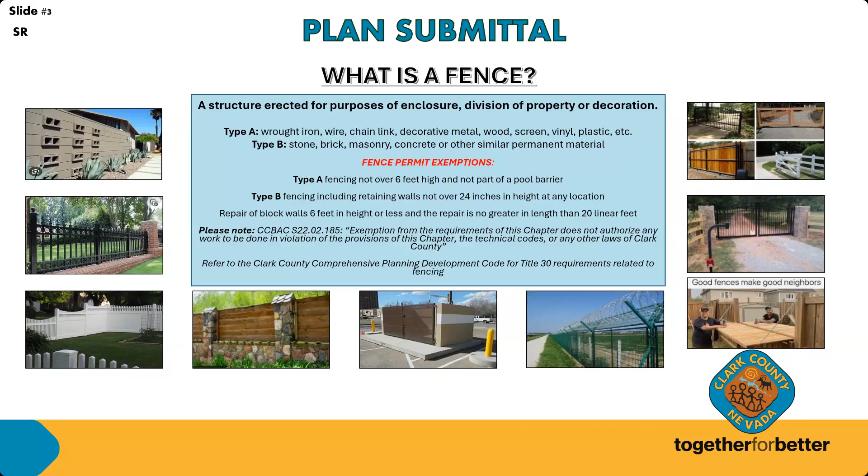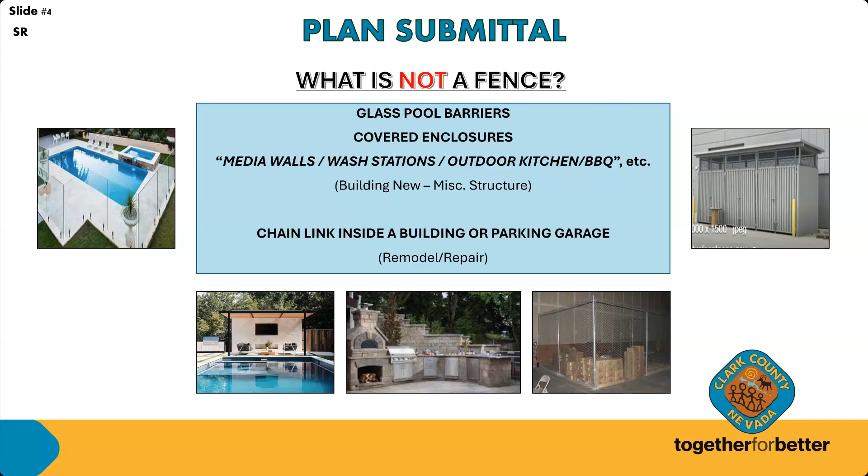So you've got glass pool barriers - you may think it's a barrier enclosing a pool, but for permitting purposes we want to permit that as a miscellaneous structure. A lot of this in terms of permit type has to do with contractor licensing, etc. So again, if you're not sure what permit type you need, if you're building something unique that could or could not be a fence, you can always reach out to us. Next slide.

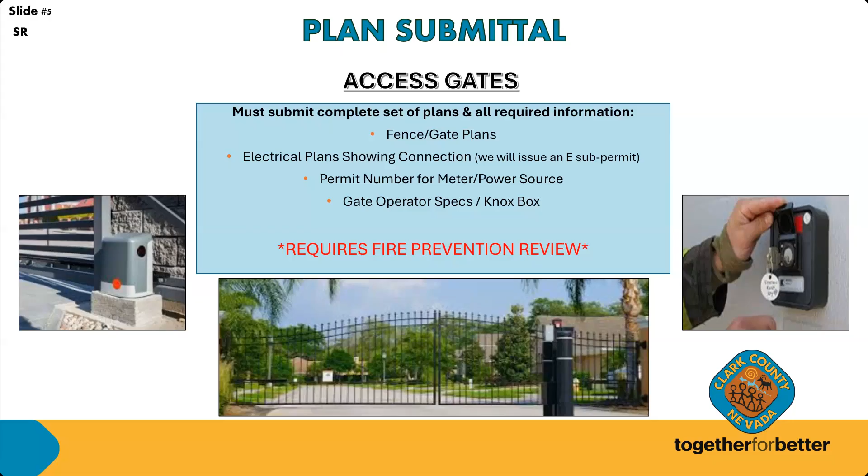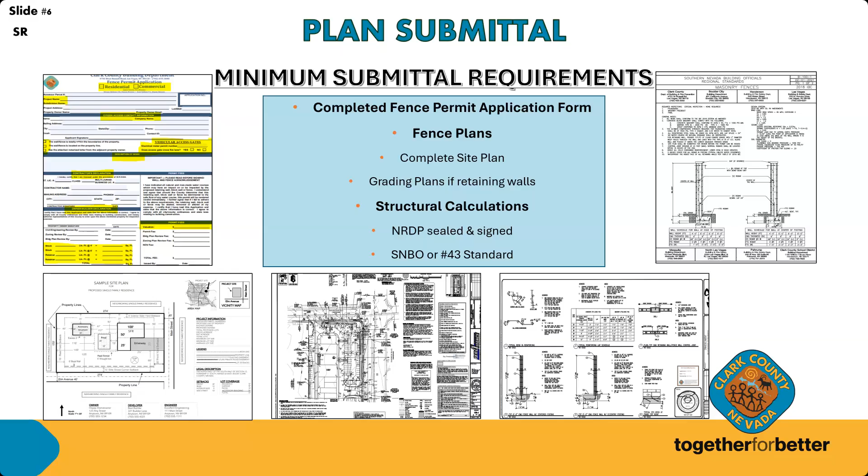I try to answer my phone as much as I can, but sometimes I find that an email is quicker, especially when we have to provide links and things like that. If you want to reach out to me, I'll try to return your call within 24 hours. With that, I think that's all for plan submittal.

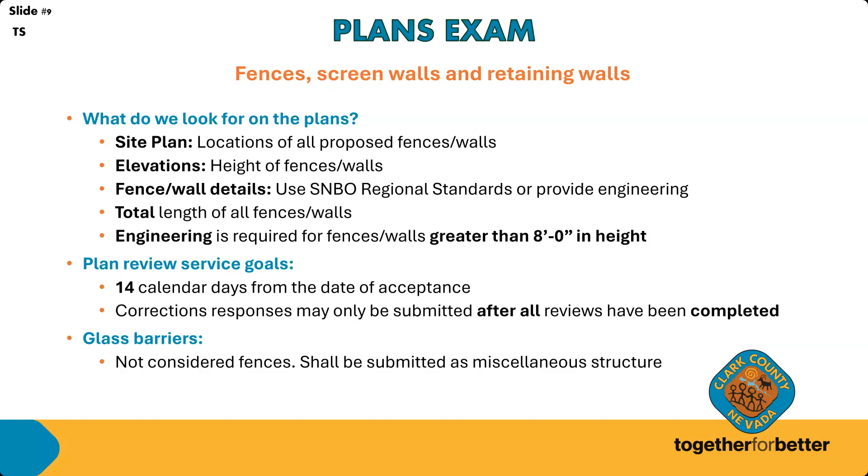Engineering, calcs and structural plans are required for anything over 8 feet. The plan review service goal is 14 calendar days from date of acceptance, and corrections, if issued, we have 10 days to review from when responses are submitted, also 10 calendar days. Glass barriers, as Stacy mentioned, those are considered miscellaneous structures, not fences.

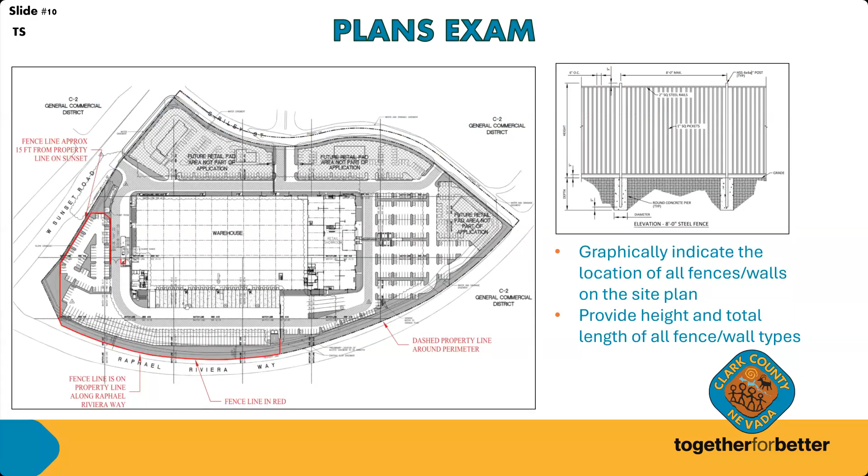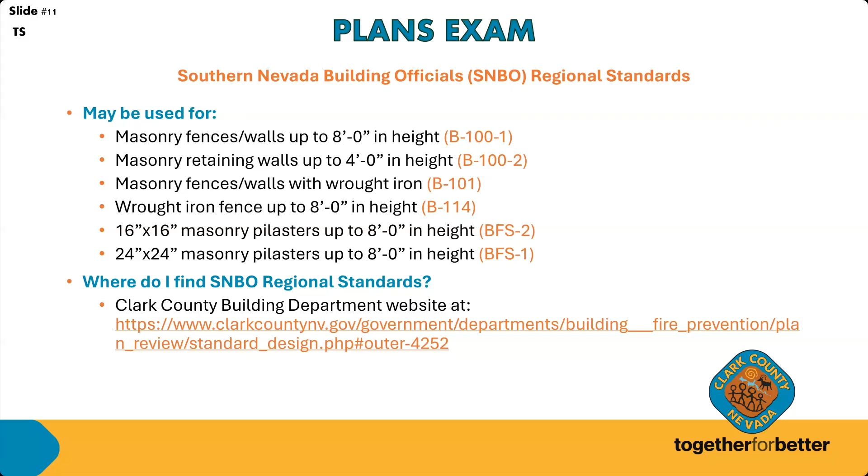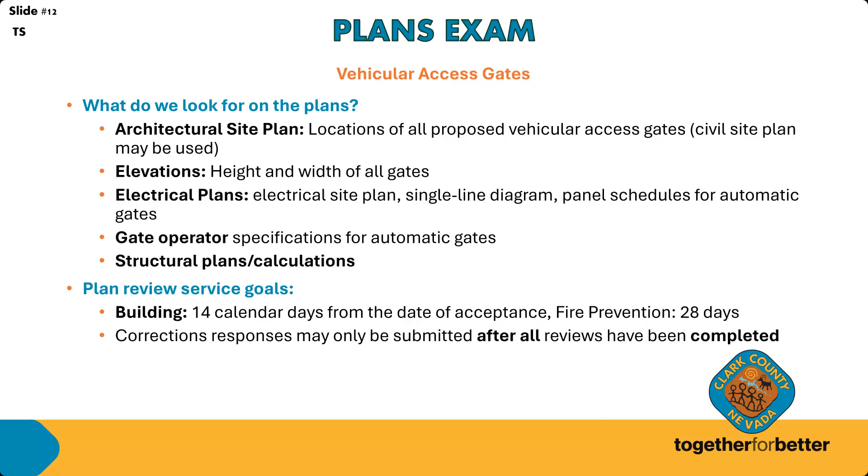This is another example of a site plan with the gates highlighted, gate elevation with dimensions, and a spec sheet for the gate operator. I think that's it - we can turn it over to fire prevention.

Thank you, Tarek. Oh, I'm sorry, Shannon, I'd have to - since we didn't have a slide on that - cover revisions. Revisions to fence permits: if you're adding length or height, or reducing the height or length of a fence, that's not allowed under a revision to a previously issued fence permit. That would have to be a supplemental or a new permit.

But if the revision is to modify, say, the elevation design of the fence, something that doesn't impact the height or length, that can be done as a revision. Or sometimes it's just moving the fence over a foot or two, changing the setback, but it could still be approvable as a revision, as long as the height and length don't change. Thank you, Tarek.

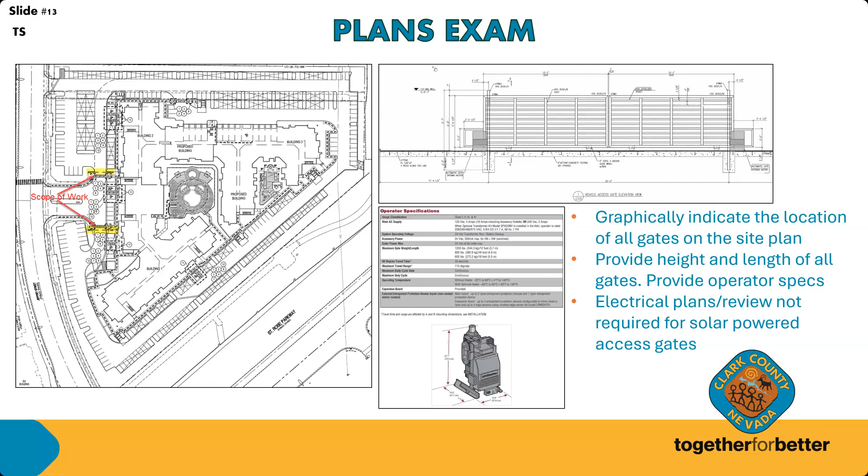On our first slide, we discussed the gate class types, and we'd like those labeled on the plans.

And then we have the applicable codes: the 2018 IFC, our amendments to the 2018 IFC, and listings and ASTM requirements. If you're going to have electrical gates and operations, they all need to be listed per those codes. As far as submittal requirements, it's going to be the same package as building, so most of this initial stuff will already be included with building.

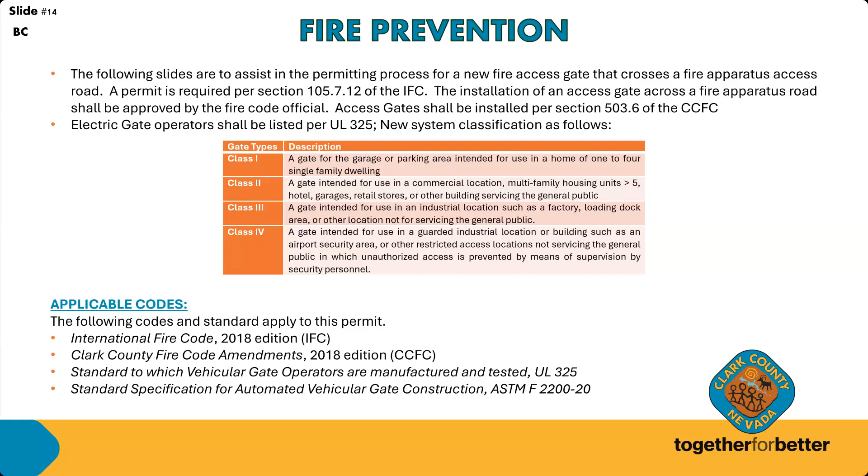Back to the gate type, the main thing we're going to be looking for here, I'm surprised we didn't put it first, is our site plan. Some people will make a site plan called a fire prevention site plan, or we've often stamped the site plan that's been submitted to building for the architectural site plan, just one of those types of site plans showing the gates.

We want a designation on this plan that we're going to stamp, showing whether the gate is automatic or manual, and the type of gate - horizontal slide, swing, vertical lift - the direction it's going to open, if it pivots, and in that same location clarify the class. Provide that on the site plan, the same site plan building's going to be looking for. We just want those additional notes about the gate.

And the gate opening has to be a minimum - if it's blocking a fire access lane, that's where a fire prevention permit is required, so that's when it's considered a fire access gate. I should have explained that better right off the bat, but a fire access gate must be a minimum of 20 feet wide, and the access lane it's blocking has to be a minimum of 24 feet wide.

So the access lane can only go to 20 feet wide right at the gate - we need that 24-foot width in or out, however the gate is done. If you have multiple gates, like an in and an out, we need at least one of the gates to be on a 24-foot fire access lane. Both gates will be required to be 20 foot, and we have allowed narrowing of the exiting gate or something, but we want at least one of them 24 wide for the fire access lane.

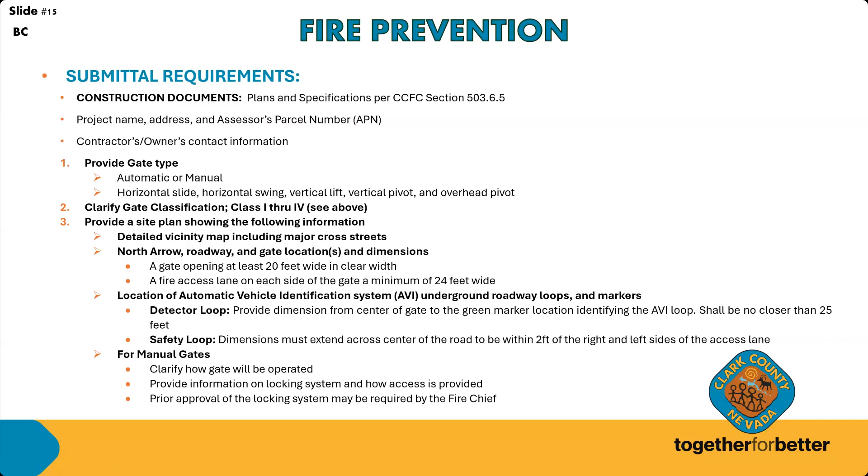If it's an AVI system, which is electrical, then it's required to have an AVI system. So we're going to be looking for the detector loop and all the other safety loops, as they're calling them. These types of systems are the items we showed on the first page, manufacturer tested per UL 325 and ASTM requirements. We want to see the listing information and make sure it's per these styles, as you can see on page 3 - we describe quite well what we're looking for.

Also part of the listing is the AVI transmitter information, and you can contact the warehouse. What happens is when you buy one of these AVI systems, those transmitters will automatically be sent to the fire department warehouse. Manufacturers and gate installers understand and know that transmitters are always sent to the fire department, then distributed from there.

These are for all types: ambulance, fire, police, will all have the same type. It's like they call it a puck. It fits up under the car or the vehicle and allows access.

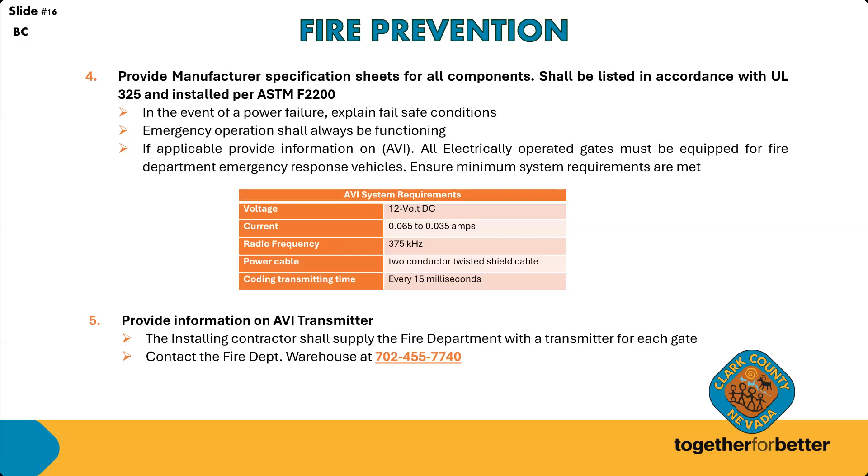The one other plan that we're always looking for on an automatic gate is the last page, which shows our entry loops, exit loops. What happens is these are buried wire underground that go to a listed panel, and when this device goes over top of them, it allows the gate to automatically open.

So we want to see a plan like this. We're looking for the loops to be actually 25 feet from the center of the gate. This isn't the greatest description, but we want that loop to be 25 feet from the center of the gates. And then the other thing we want noted somewhere, and quite often it's in the listing, is that the gate will fail safe in power failure in the open position.

I think if we see the items that I just described, we're pretty much good to go. We'll accept the gate. I can't think of anything else unless someone can think of something that I may have overlooked, but I think we're good. All right, thank you, Blair.

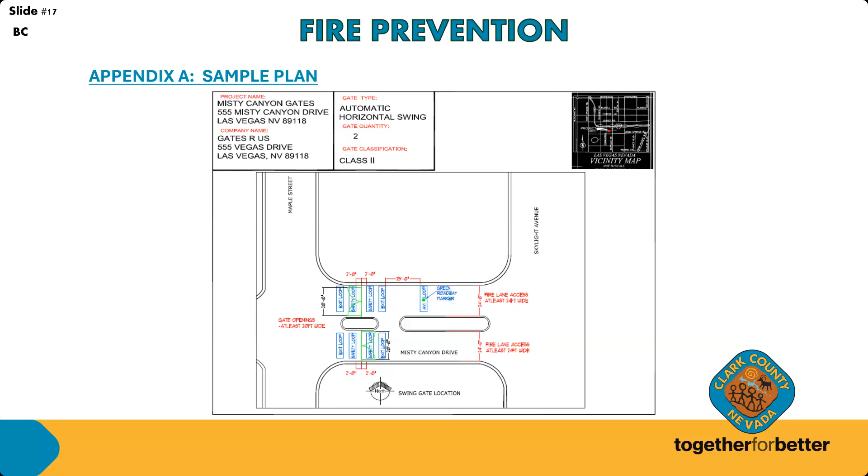So with that, we'll go into engineering, and I'll turn the presentation over to Ray Jones.

Next slide. Retaining walls or Type B walls greater than 24 inches require a grading plan which is prepared by a registered design professional. For commercial or subdivision projects, the Clark County Building Department approved grading plans shall be provided. Details showing the depth of the retained earth shall be included in the grading plans. Grading plans, structural plans, and structural calculations must be prepared, sealed, digitally signed, and dated by a Nevada registered design professional.

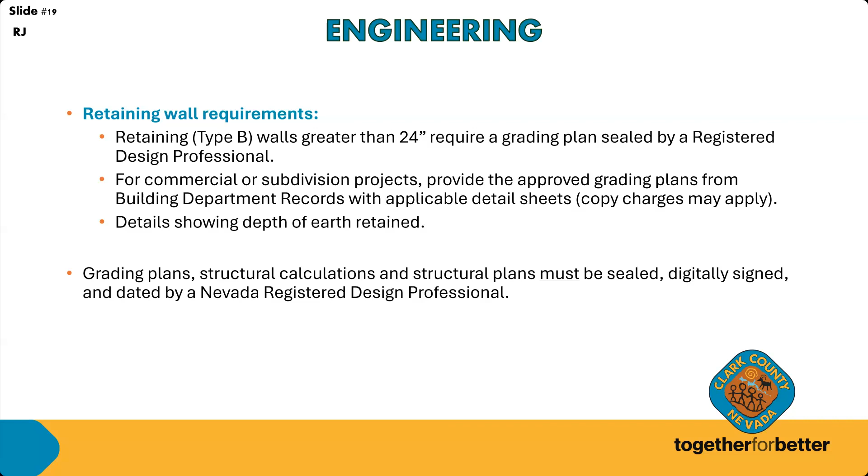Next slide. So the SNBO regional standards may be used in lieu of structural plans and calculations, given that the walls are within the height limitations of the standard details. The conditions of the walls must match the details exactly. One cannot deviate from the SNBO standard details. For example, sloped backfill or surcharge loading on retaining walls are not permitted.

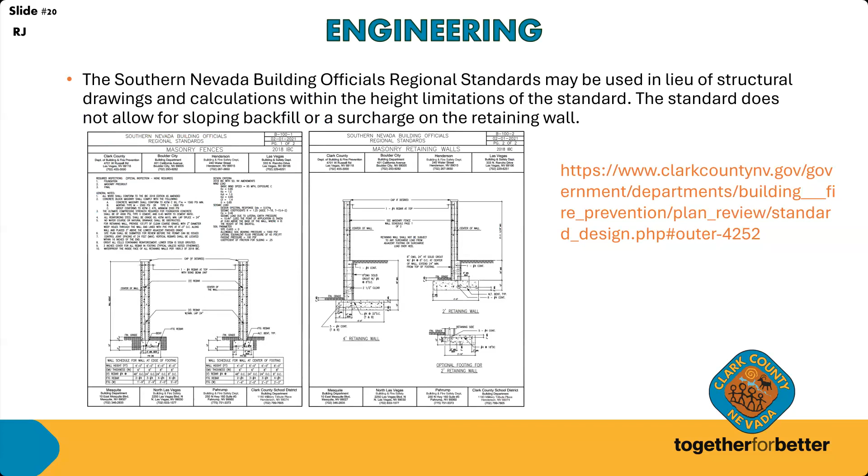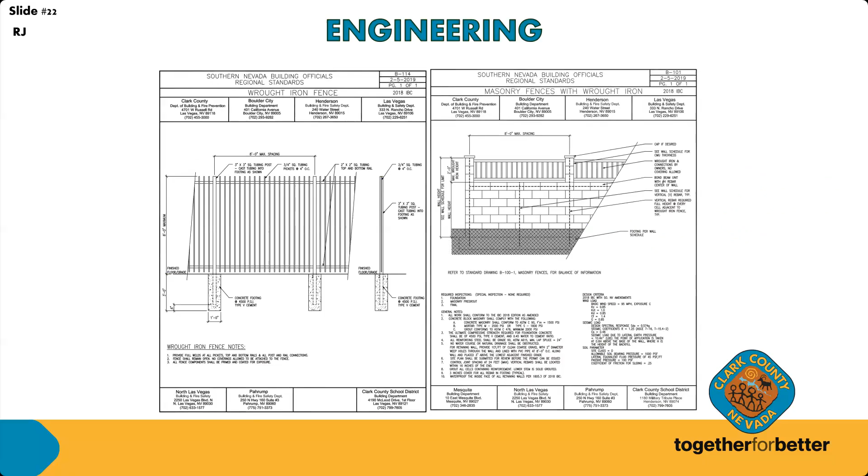So now we'll move on to the geotechnical and engineering code requirements for fences and retaining walls. Southern Nevada Amendment, Section 1803.2 states that fences and site walls less than 6 feet of retained height are exempt from a geotechnical report. When a soils report is not used, the maximum soil code presumptive values shall be used for the design. Where a geotechnical investigation is required, a written report of the investigation shall be submitted to the building department for review. The geotechnical report shall be prepared per Southern Nevada Amendment, Section 1803.6. All geotechnical reports shall be current within the last 12 months or accompanied by an update letter.

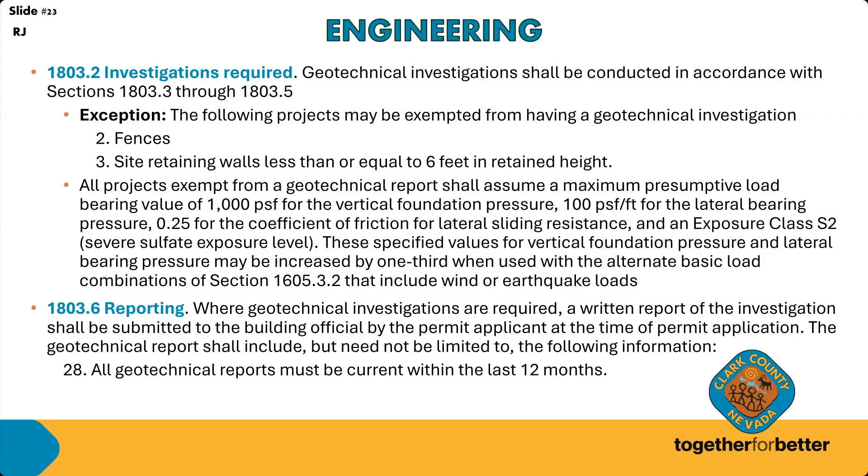Go to the next slide. When a soils report is not utilized, soil site class D shall be assumed per Southern Nevada Amendment, Section 1613.2.2. Southern Nevada Amendment, Section 1809.4 states that the minimum depth of the footings shall be 12 inches. Where applicable, the frost depth requirements of Section 1809.5 shall be satisfied. The minimum width of footings shall be 12 inches. Next slide.

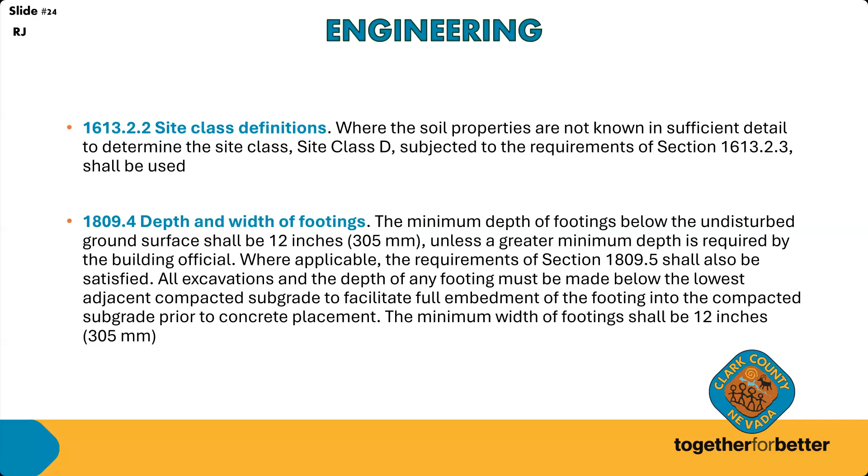Southern Nevada Amendment, Section 1610.1 states that the foundation walls and retaining walls shall be designed to resist lateral soil loads. Please refer to this code section for the code presumptive design values. And go to the next.

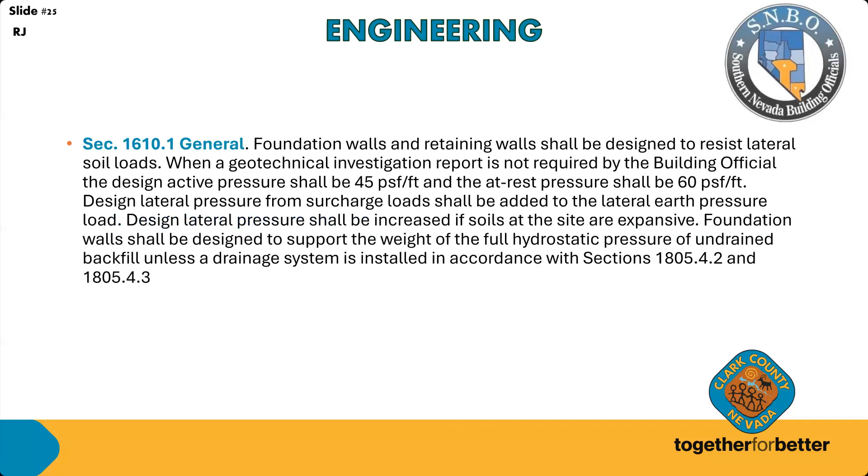Southern Nevada Amendment Section 1610.1.1 addresses the seismic loading for basement, foundation, and retaining walls. These walls shall be designed to resist the seismic load due to the lateral earth pressure based on the equations below in this slide as required per section 1807.2.2. Okay, next.

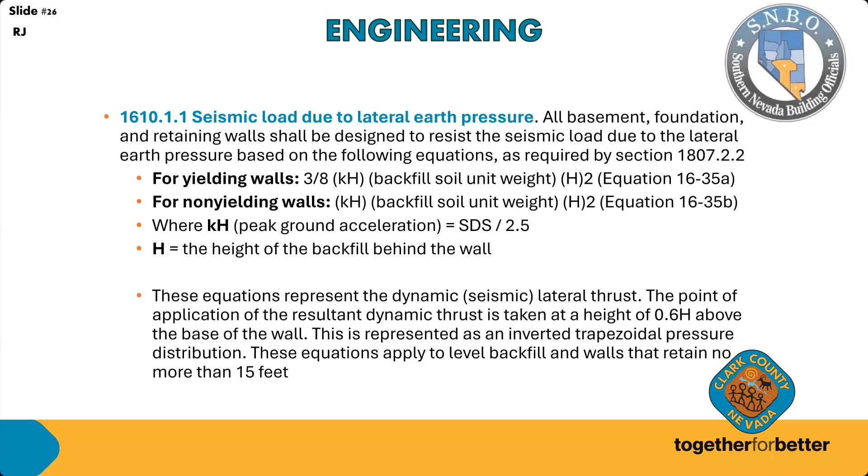Section 1807.2.3 discusses safety factors. Retaining walls shall meet a minimum safety factor of 1.5 for sliding and overturning. Alternate load combinations discussed in this section shall be used to design the retaining wall footings instead of Section 1605. Where earthquake or wind loads are included, the minimum safety factor for retaining wall sliding and overturning is 1.1.

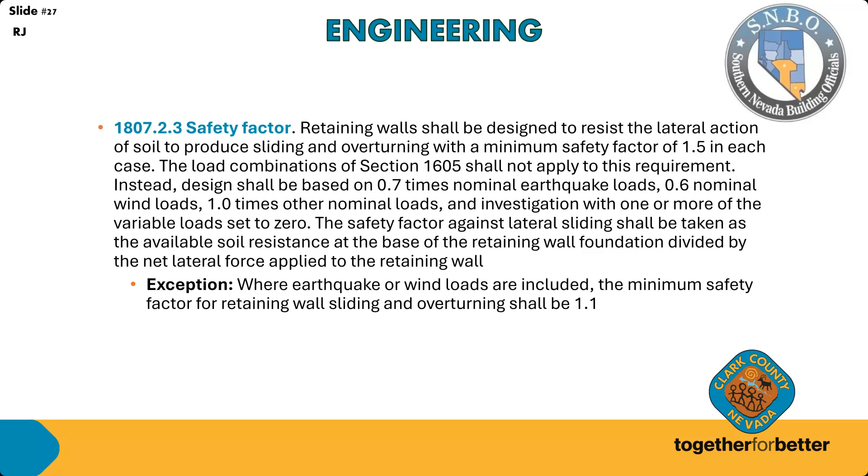Okay, now we're going to move on to the special inspection requirements, which are required for each material type.

Southern Nevada Amendment Section 1705.3 states the special inspection requirements for concrete. This section does include an exception for isolated and continuous concrete footings supporting walls, where the structural design of the footing is based on a concrete compressive strength of 2,500 psi, regardless of the concrete compressive strength specified in the construction documents. Please note that all concrete walls require special inspection.

Southern Nevada Amendment Section 1705.4 states the special inspection requirements for masonry. There is an exception for masonry special inspection where the masonry walls are designed with allowable stress design at half the masonry compressive strength. The walls must also meet the height restrictions listed here within this code section.

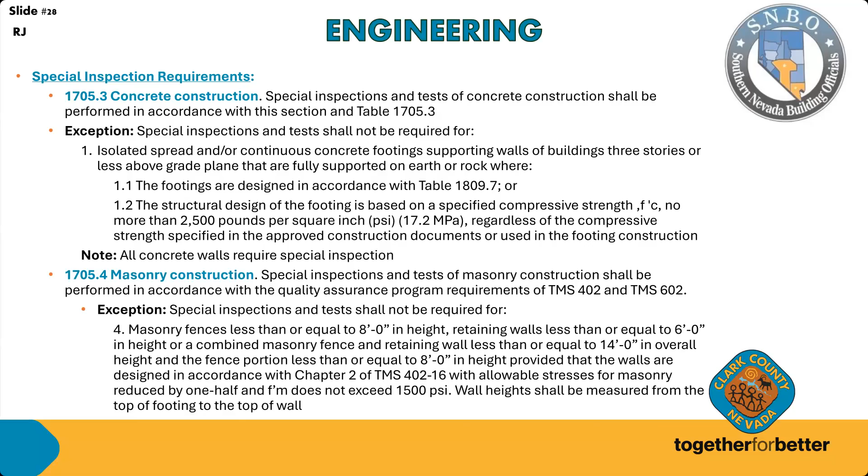Southern Nevada Amendment Section 1705.6.1 is for the special inspection of wall backfill. Special inspection of wall backfill shall be required for site retaining walls when the retained soil height exceeds 6 feet, or for portions of the wall that receive surcharge loading from adjacent walls or other structures, regardless of the retained soil height or sloped backfill.

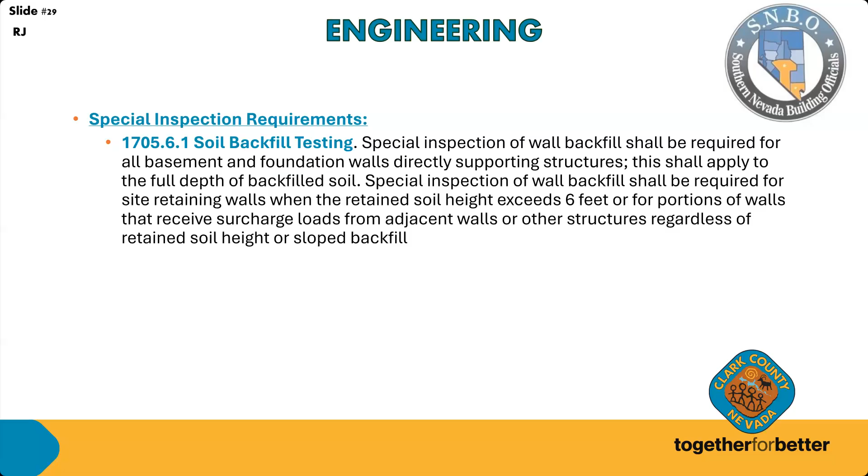Here's some helpful hints for your submittal. Please ensure that the scope of permit is shown on the grading plan and applicable details are provided. For example, if you're applying for a 4-foot maximum retaining wall, please do not include details for 6-foot and 8-foot maximum retaining walls. The wall section shall show the drainage system for retaining walls.

If a soils report is being used, please provide that soils report. Also include the geotechnical information within the structural general notes. And then also list all of your special inspection requirements on the plan.

If special inspections are listed which aren't required per code, the plans examiner will indicate that the special inspection is required since it was requested by the registered design professional. Similarly, do not include a blanket list of special inspections. Inspections should be specific to that permit.

And then finally, the soils report, the structural plans and calculations shall be digitally signed and electronically sealed by the registered design professional. A signature image is not a digital signature and does not meet the security encryption requirements.

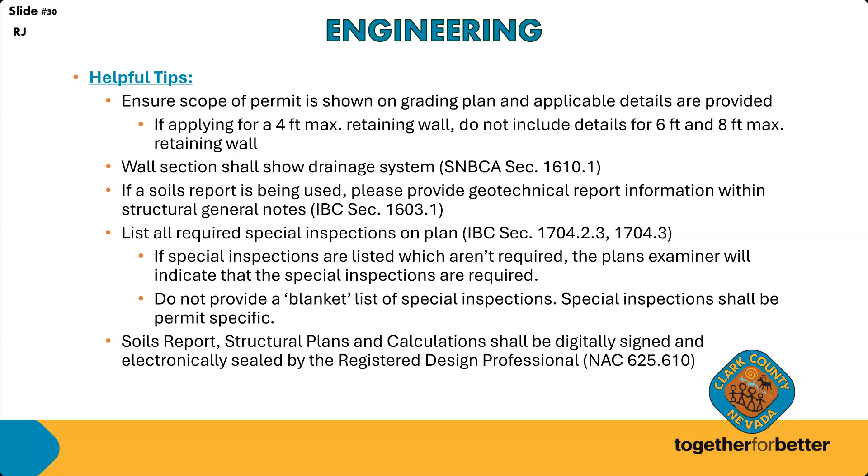So let's move on to our civil review by Public Works Development Review Team, and I'll turn over to Debbie Lay.

Hi, my portion of the review is basically what civil does: we look at drainage, we look at easements, there's a lot of engineering that goes into the plans, and so my part is to make sure we're using the plans per the designs for the project.

So all the thought process should be done, and we're just making sure that the walls aren't in conflict with those designs. And so again, like the others have said, it needs to be a clear plan, as much information as possible to make it clear.

But in a lot of cases, we already have grading plans for the project. And ideally, we have those plans, and you're just saying, these are the walls we're building per these plans. And so that's a lot of the trouble that we run into, is just that we're not getting the version of plans that we want.

Like it might be an unsigned version or a version that's not consistent with the designs. So as far as the majority, like the subdivision block walls, that's a lot of the problems that we have, is that it's just not the approved grading plan.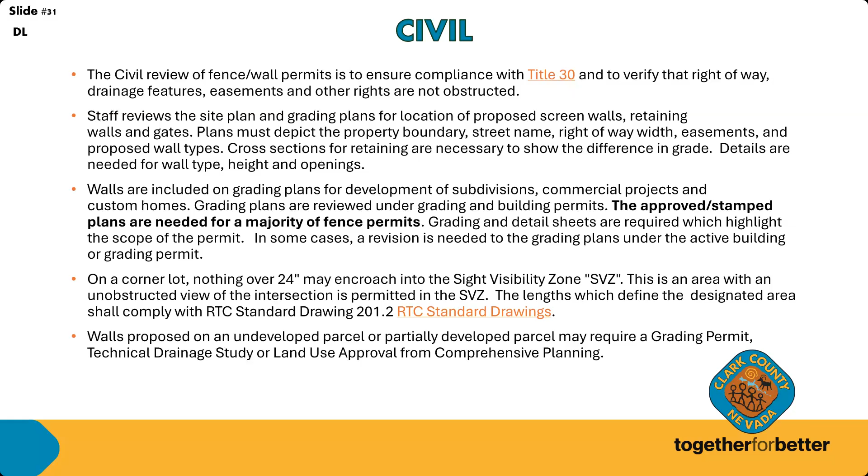Next slide. Can we get the next one? Debbie, this should be the next one about gates. Do you see it? No, it's not. Oh, okay, here we go. Sorry.

Yeah, I think that covers it. So again, we're looking at civil plans, not necessarily site plans, but we do make sure they're consistent. There's just so much more detail on the civil plans for civil and zoning to look at - that's preferred. But if it's a property that's existing for many years and there's no new approved plans, then we'll just review it with the codes specified there.

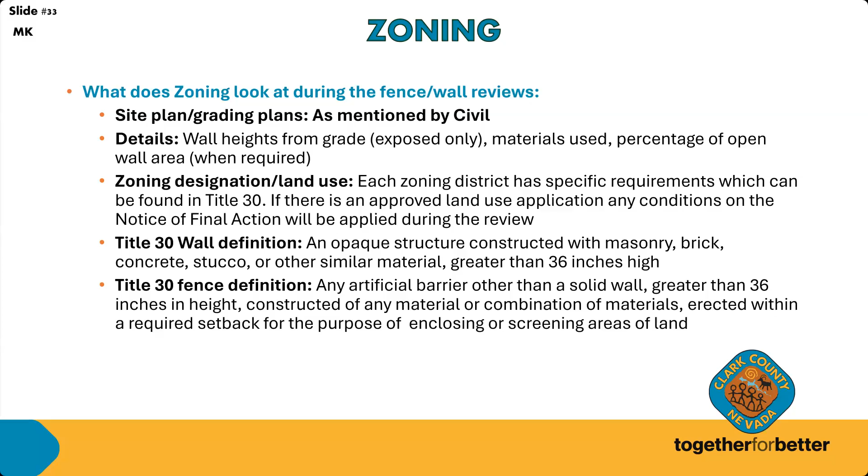Okay, next page. Single family - normally fences and walls proposed outside of the setback shall be limited to primary structure or accessory structure height, whichever is less.

Front setback: fences or walls proposed within the front setback shall be limited in height as follows. Residential district, 3 foot maximum within the first 15 feet. A fence may be increased up to 6 feet if decorative in those zoning districts RS 80, RS 40, RS 20, and RS 10. I hope you guys know that we changed the zoning naming district.

A 6 foot high wall is permissible along collector and arterial streets. So those are the difference.

A single family dwelling may restrict access with an access gate if access to the dwelling is from an arterial or collector street. The access gate shall be set back at least 20 feet from the property line, and this one we coordinate with the fire department. So normally when they look at it, we coordinate when approving gates with fire department and architecture. In the urban area, fences and walls along a street shall be decorative.

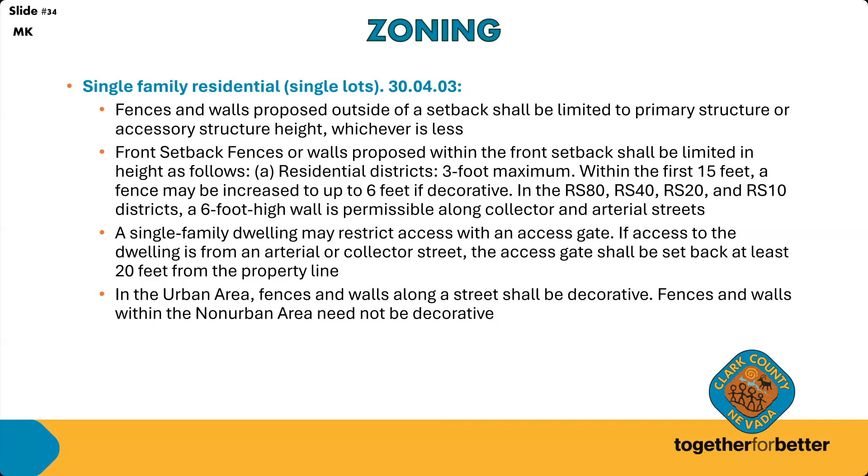Fences and walls within the non-urban area need not be decorative, in areas like Moapa or Logandale or somewhere. Those are non-urban areas. Okay, next.

Commercial and residential subdivision and community walls. Walls being reviewed for commercial projects and residential communities are required to be submitted on approved grading, as engineering and civil mentioned. Normally this is the problem: sometimes people just submit plans where they don't have approved grading, and we want approved grading, and that should stick with everyone - that approved grading should just show where the walls are going to be erected.

The address for the permits is typically the grading permit address. So make sure you just look at what the grading was addressed. That is the address you put for your walls.

Retaining walls shall be no more than 3 feet in height as measured above finished grade of the street, sidewalk, or adjacent property. Retaining walls may be increased to 6 feet as follows: the fence located on top of the retaining wall must be 85% open. Subdivision retaining walls along a residential or local private street shall provide a minimum of 6-foot landscape strip between the wall and the sidewalk of the street. Interior subdivision retaining walls between residential lots with initial development may be increased without additional landscaping requirement.

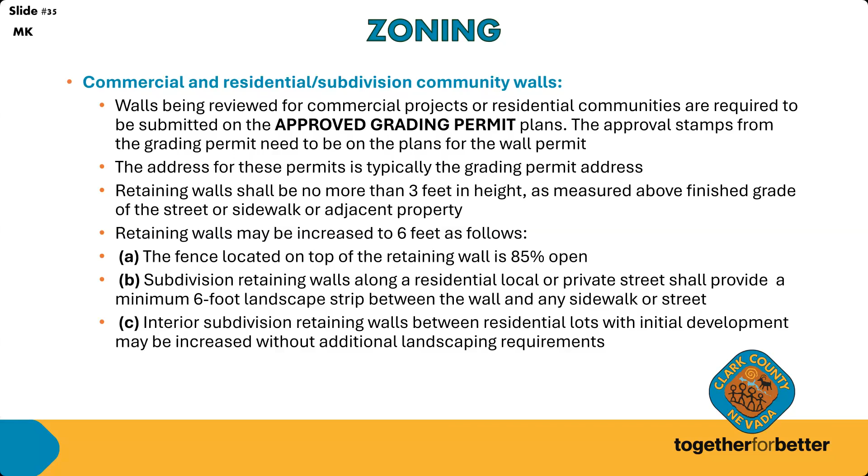And with that, let's say you got all your disciplines reviewed and approved on your fence permit. So we'll move over to assessing your fees, and I'll hand over to Dana Margaritis.

Hi, so the fee workup team will calculate the building permit fees once all the workflow tasks have been completed. The building and plan review fees are based on the project valuation, which is determined by the total value of work, including labor and materials. You can find the full definition in the administrative code on our website - go to Services, then Library, Current Codes and Ordinances.

If you'd like an estimate of your permit fees, you may use the fee calculator on our website. To locate the fee calculator, go to Services, Permit Issuance, and then there is a tile labeled Fee Calculator. Please note, in addition to the permit and plan review fees, access gates will also be assessed a fire prevention fee of $90 per access gate.

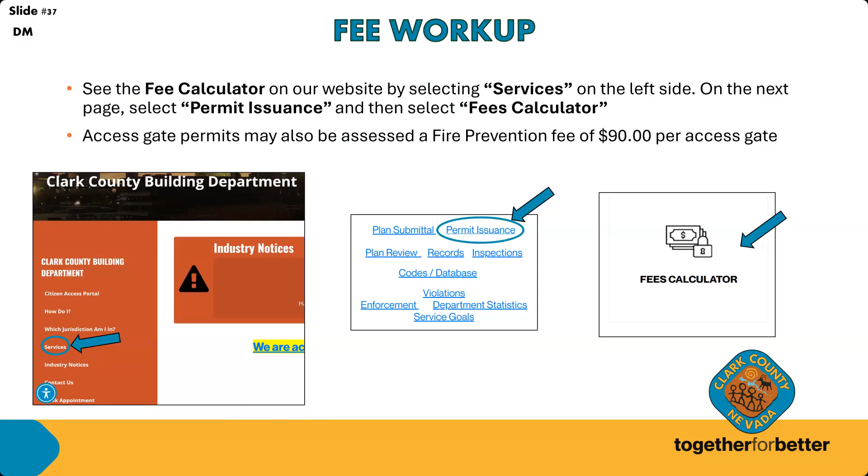On the fee calculator page, select the blue fee calculator, then go to the next page and select permit. Once you enter the valuation, it will calculate the permit, plan review, and zoning plan review fees. There will be no plumbing or mechanical fees associated with a fence or a wall. In the event there is lighting on a block wall or electrical for the access gates, those fees will typically be charged on the electrical permit.

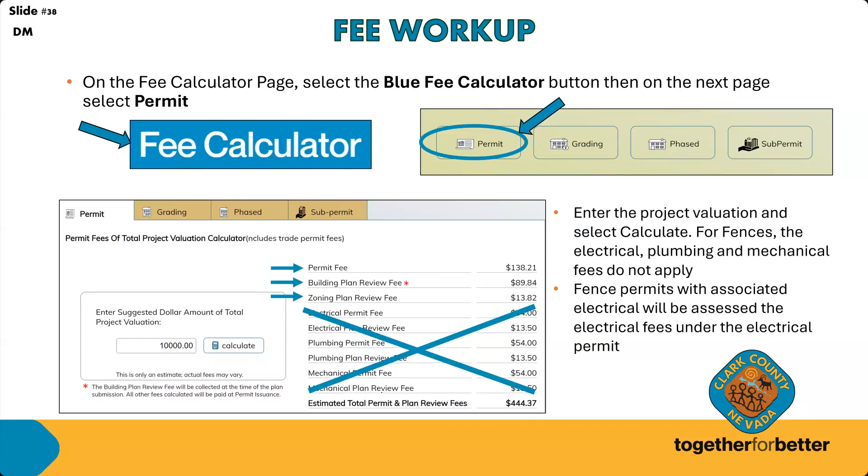Once the fee workup team has finished calculating the fees, they will put the permit in ready to issue status. The contact will then receive 2 emails: one letting you know the permit is ready and the amount due, and the other letting you know you have conditions that need to be met prior to issuance. Make sure to open the attachments in the emails to get the invoice and the list of conditions.

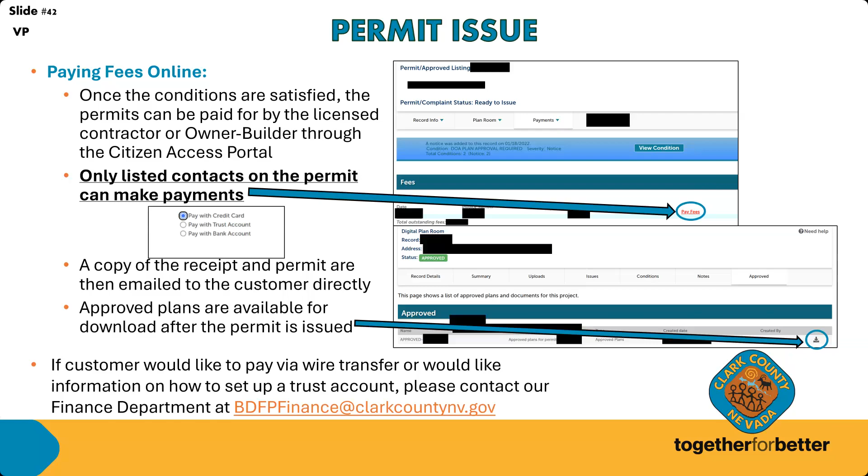Thanks, Anissa. All right, so you got your permit. You're going to go out and construct your walls, and I'm going to turn it over to Matt Brewer so he can go over inspections with you.

Available to schedule. They may not always line up with the type of fence you're building, but you can always talk to me or one of the supervisors and we'll get you on the right track.

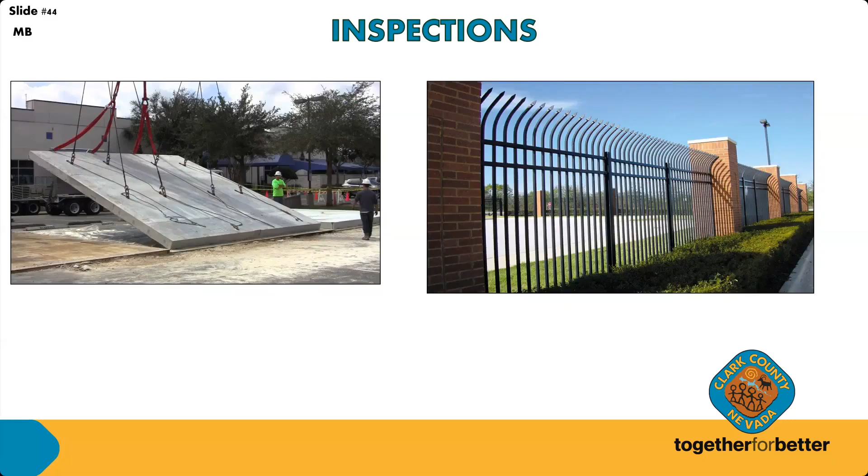You may not always have CMU or pre-grout, but the types of permits we have, this is kind of a one-size-fits-all. So we'll conduct the inspections that are required. But like you said, if there's any questions, just reach out to us and we'll help you out along the way.

That type of installation will require special inspections, so just be aware of that. Make sure that your third-party agency is on board and performing those inspections as needed.

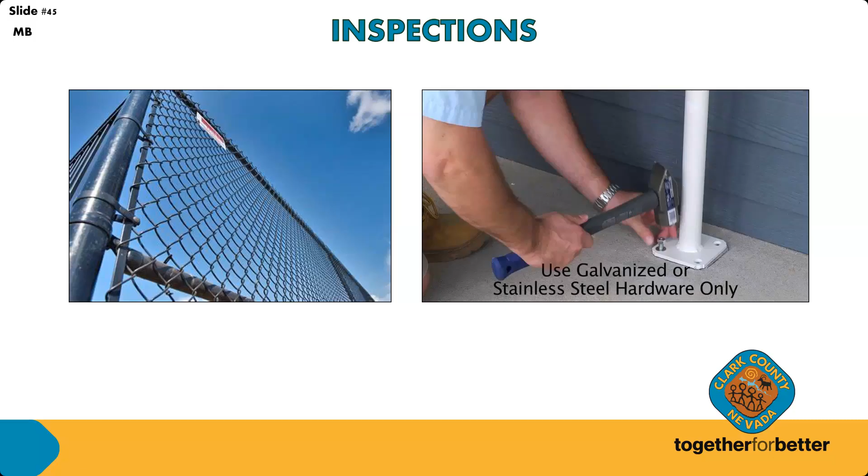And then along with your site plan that's reviewed by the building department and your structural details, we also have to rely on the civil plans. Like Debbie said, we've got certain requirements that need to be installed.

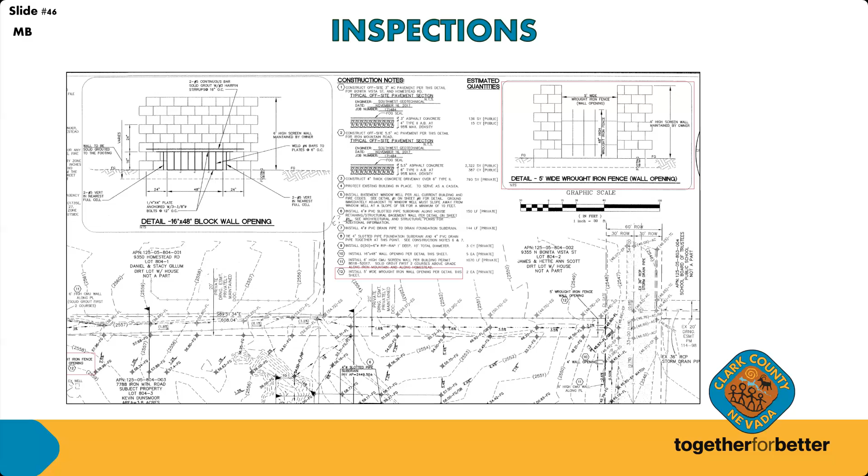You can see here we've highlighted that there's some wall opening details that only occur on the civil plans. So be aware that you're going to have to look at multiple construction documents to get the full picture here. But we don't want these things to be missed during your construction because they're vital to a fence. You don't want to create a flood or back up water on your own property.

Okay, next slide please. Again, this is just a highlight of that detail on the civil plan, saying that you need to have those wall openings installed, normally along a naturally occurring drainage line or even now an artificial drainage area.

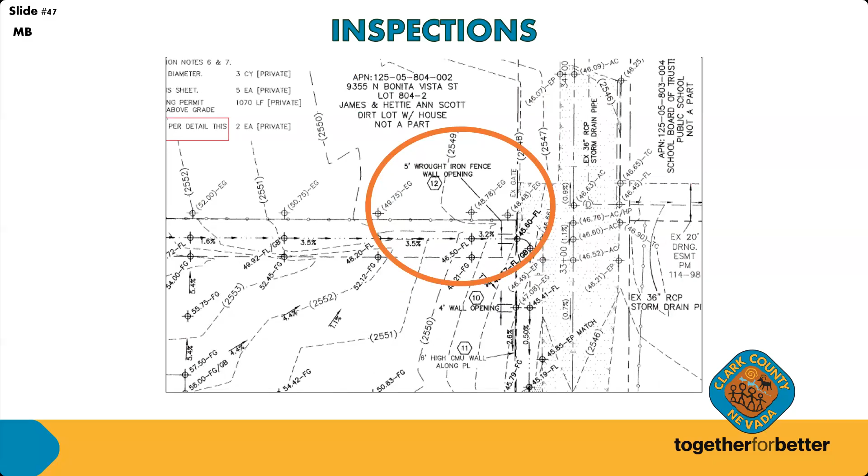Okay, next slide please. We've got a lot of these slides, I'm sorry. Again, just a highlight of the same thing. Okay, next slide. So, inspections.

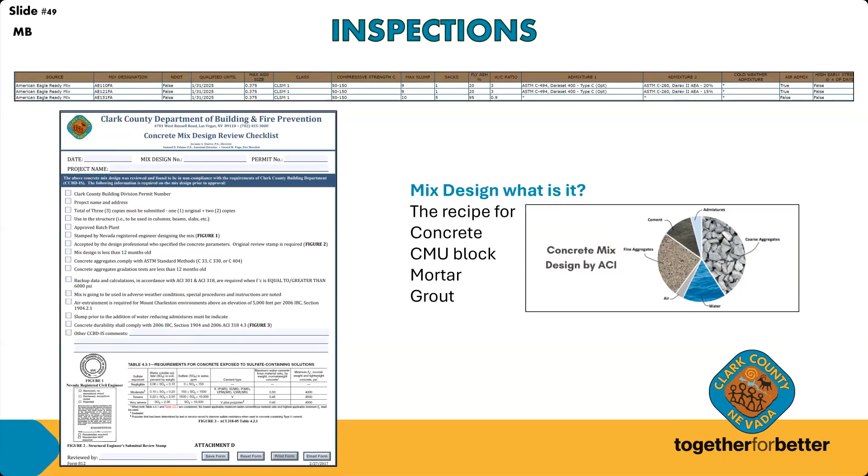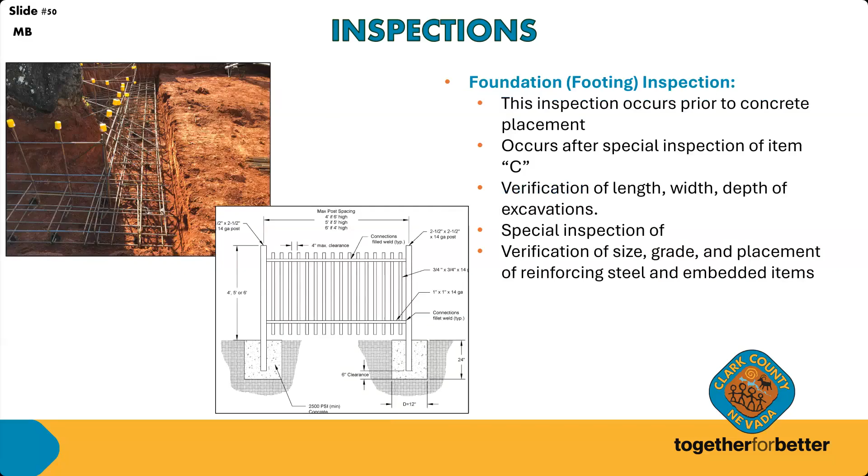And this is what we do. We verify the size of it and everything.

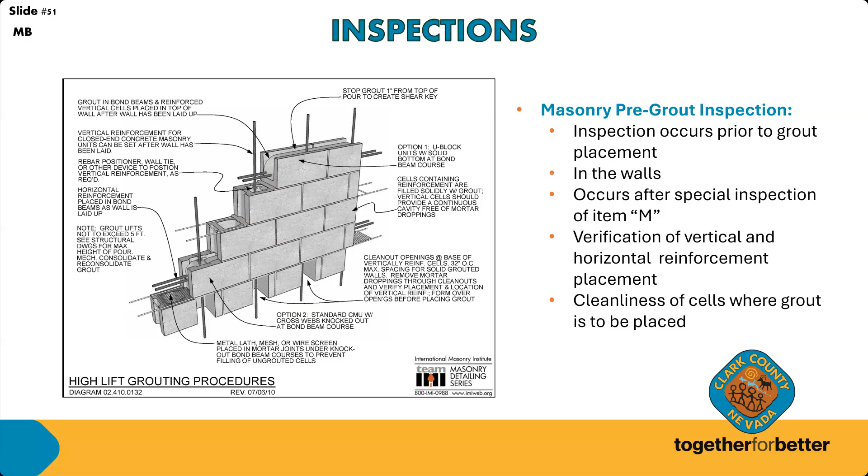So a pre-grout inspection, if you have a CMU type of fence or wall that you're building, that's to verify that the cells are clean, the reinforcements are in place, and clean outs are installed if needed based on the height of the wall. A pre-grout inspection on CMU walls is required, but it may not be required on a concrete wall—that may be the only type of inspection you're able to schedule. But if you need to schedule that, we'll work with you to get the details and the inspection notes right.

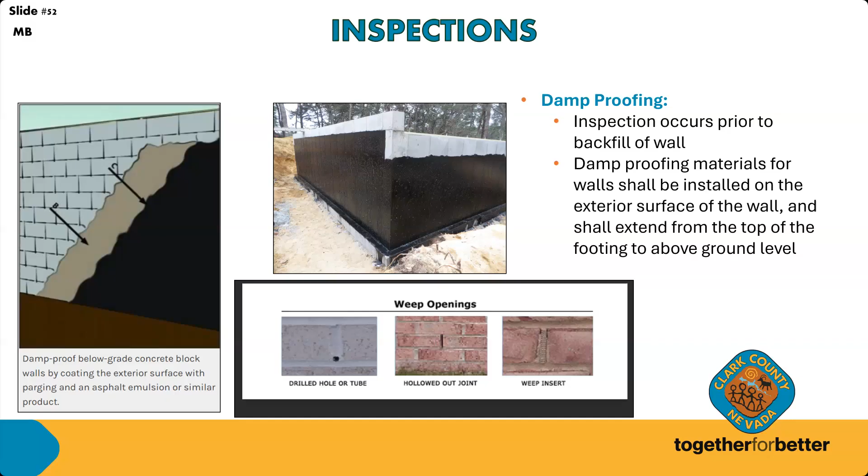Then there's wall drainage, a little bit different than damp proofing. The wall drainage occurs on the outside of the wall, but it's vital to protect your wall. You want to take that groundwater and direct it away from, definitely, retaining walls or basement walls such as this one.

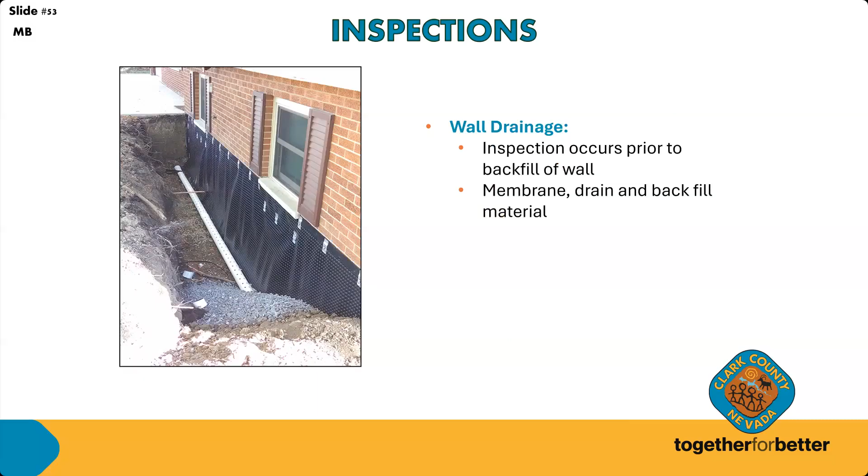AVI access—I know Fire talked about it. It's a requirement prior to final building of the building permit that you have your fire clearance. So make sure your AVI access has been verified by Fire and that they have a fire clearance installed.

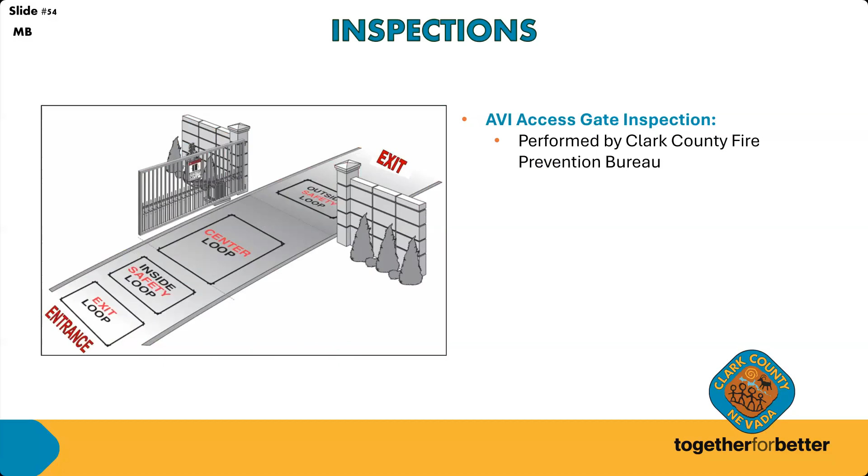And then when it comes to your final building inspection, DASMA—that's where we took this information from. Its main purpose is to avoid any injuries from a sliding gate or a swinging gate. There are certain entrapment zones that we want to verify, that all the safety measures are in place, such as the automatic stops or the sensors. You can read through all the different gate notes there, but it's important to make sure that the sliding gate has all the safety protections in place.

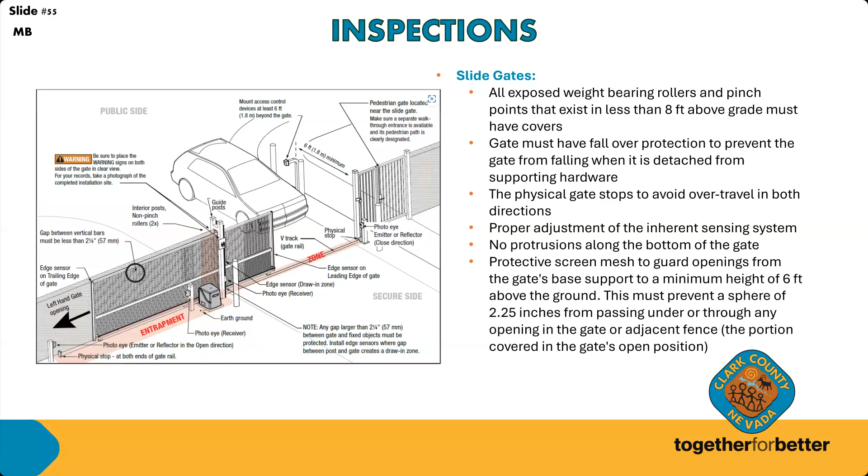Matt, I think that's your last one. Oh, that's it—I was trying to rush through so we didn't take up a lot of time. As always, please, if you have any questions, call or reach out to inspections, and we'll help you along the way.